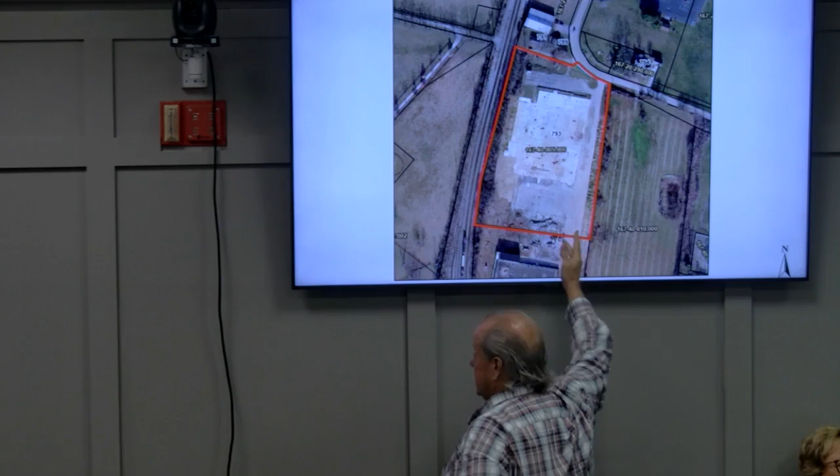Right here, yeah. And where's the gate? Right here is the roadway, existing. We're right here, they've got a turnaround area that goes all the way to the edge of grass over here and all the way out. This is their loading and turnaround area, and it's right at the entrance of the existing road. It's been there since 1988, 37 years.

And that's our only concern, we had some earlier discussions but nothing ever came of it. The other thing is, when they did this in '88, they put a 50-foot ingress and egress easement from the property line over this way in. But when you measure that out, even though the roadway - we've got a prescriptive easement since 1988 because it's been going in and out like this and everybody's been happy - we only got 11 feet in the back.

At the gate? At the gate, because of the grass area over next to where you're talking. Well, if it's not road- we, yeah, if we measure from the fence, 50 foot, we got 11 foot from the grass. And it angles this way, towards the other front.

39 feet is the grass to the side. But all we're asking is a semi-truck and loading turnaround area, if they just move it over 30 foot from the toe slope, the edge of pavement, it's always been there. Just move it over 30 foot and give us 30 foot all the way in and out. Everybody's using that right now anyway. They do have the space to be able to do that. Absolutely, yes sir.

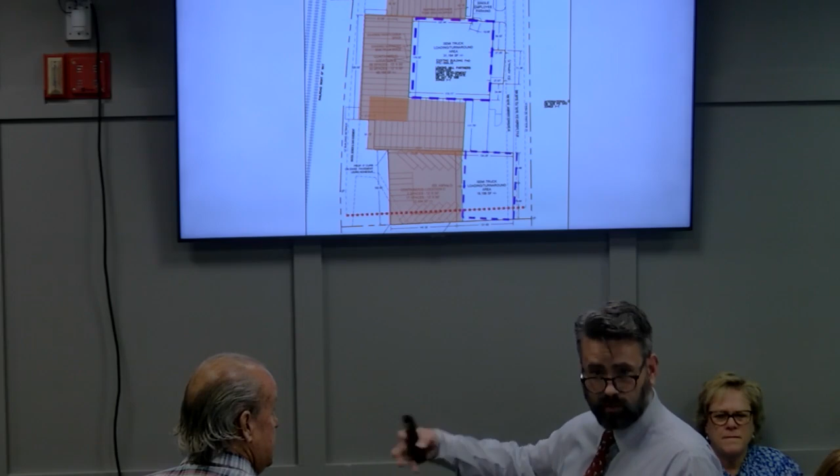May I address, please, there are some items in there that I think... Okay, if I may, Mr. Bash. Yes sir. So as part of this development plan, let me understand, are you speaking of this area down here? Yes. Okay, so I will say that the layout as proposed, while in general the development plan meets all of our standards and whatnot, there is a condition in place that all of these containers must be set back as such a building would be.

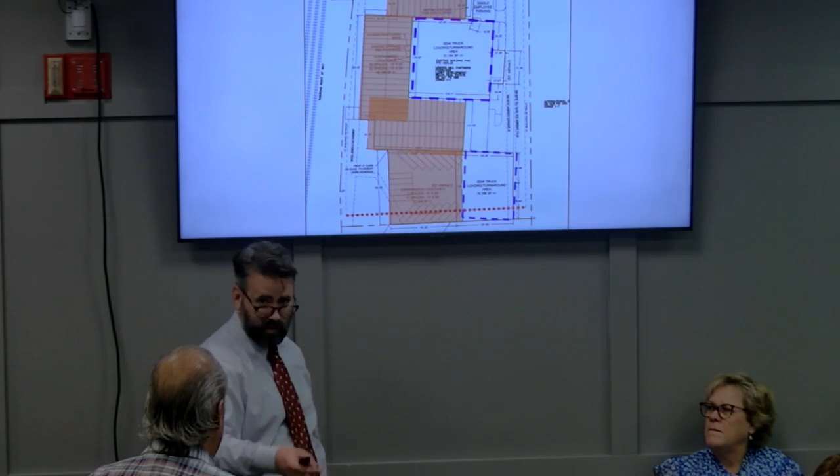That's a condition of outdoor storage. Mr. Bastion, to your point, they are currently showing the containers all the way to the property line. By the ordinance and the requirements, that's inappropriate. There is a condition of approval in there, and it is based on the standards of outdoor storage and the placement thereof, that they will have to pull these containers back beyond the setback line of the property's edge. Now, impervious surface, vehicle use area is not beholden. It would just be the containers. They're treated as if they were a structure.

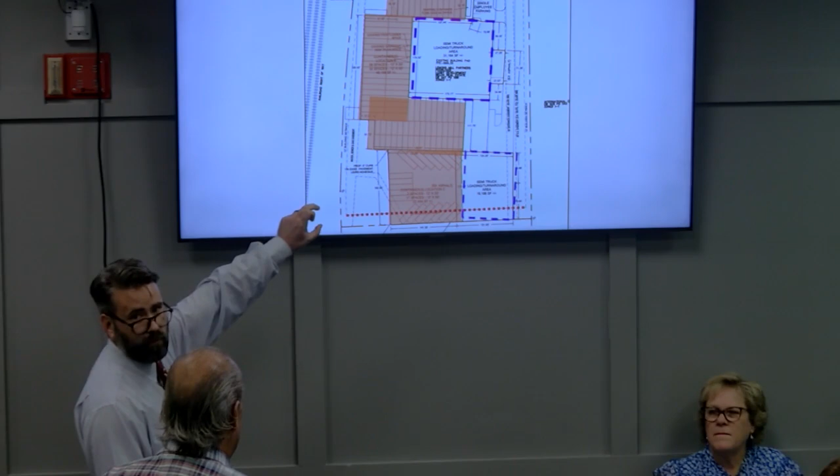I don't know if that helps your concerns, but this section here, all of the orange shaded section, is proposed storage area. So all of that would have to be brought within the setback lines before their final approval for the development.

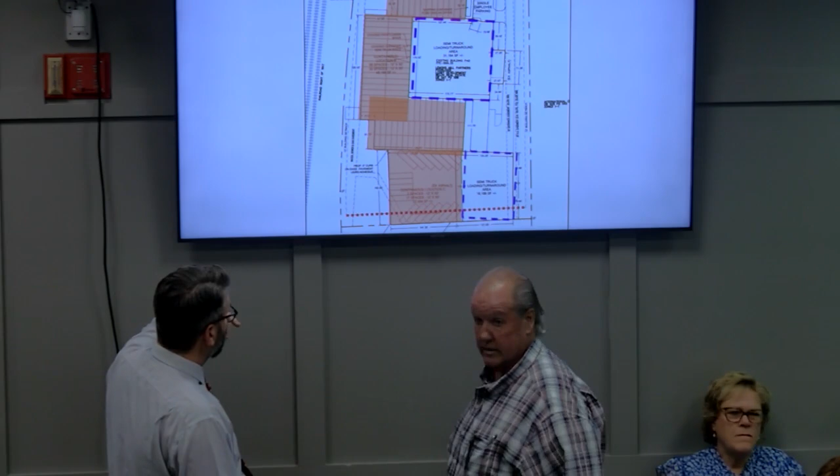I don't know what the rule is here, but I don't have a problem up to the property line. I mean, it's their property. But over here, we do have a problem because nobody can define loading and turnaround. How long? What if they get up there, I'm gonna exaggerate, a couple hours? Are we not supposed to be able to get in the property if we put a gate there? We can't put a gate over here, it doesn't match the road.

Does that make sense? I mean, yes sir. So your concern is getting into your property. That's it. That's all. I want to be a good neighbor. We just want to get to the building in the back.

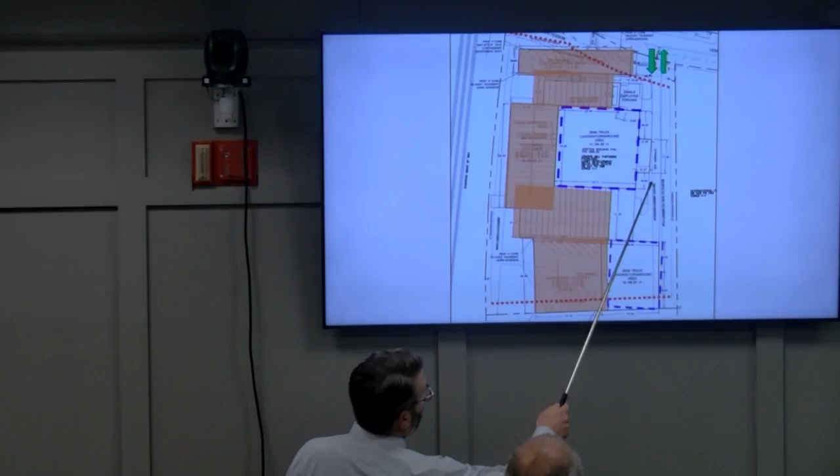Right, that's it. The access easement he is referencing is not only recorded on pre-existing plats, but also noted on the development plan with a plat reference. It does exist on his development plan. He's saying, goes from the property line to right here, we have 11 feet. What I can do then is I can come up through here and I'll plow up this all the way through there and I'll make it through the utilities and all.

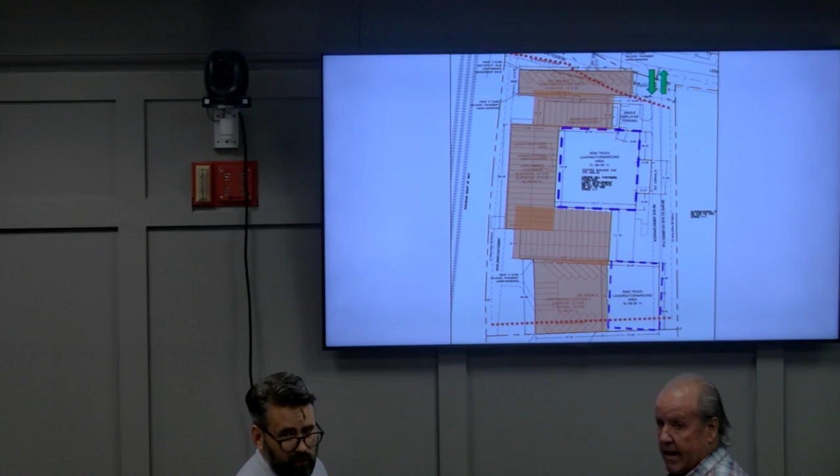Easements are a civil citizen-to-citizen thing, but we do note them on recorded documents. Mr. Perkins and Holden, if you have anything else to add in that regard. If that's the recorded easement, if a plan doesn't work, we can still make adjustments to it. But we do in fact generally recognize the easement that exists. But if that doesn't work with the plan, and this doesn't sound like it's working, then we can make adjustments to that. In effect, we can require more than what they actually got for an easement.

It's designated on the development plan as 50. On this drawing right here, it actually has the turnaround area over in the entrance. Is that right? Does that make sense? You see that over there?

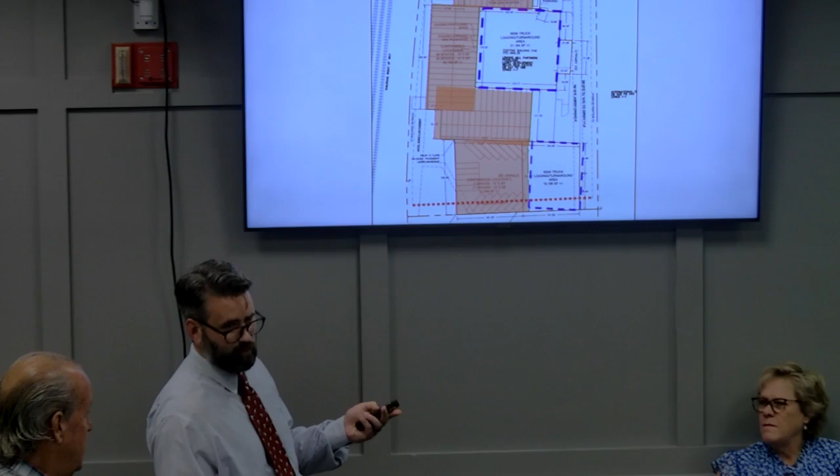It does, but again, this is just a repurposing of what exists. It's not any addition, maybe improving the impervious area. The applicant and the representation, I believe, are here as well, and may speak to more than that. The way staff understands it, and it's been presented in this case as well as part of adjustment, is that nothing necessarily will change here. It's just reuse of the existing impervious surface. There's no structures being put up.

If it would help the commission, I'd be glad to give the full presentation. Well, I think if we could, the developer, the owner's here?

I think we just got the one issue. If we could get their interpretation of the easement, because I know they're not gonna park anything there, but I understand what he's saying. You got to be able to get into the property. Define how long is unloaded. Nobody wants anything unloaded in front of their driveway going to their house. Unload it over to the side, that's all I'm asking, move it back this way. And we had spoken about that.

I'm Brian Ward, Palmer Engineering, representing the applicant and the landowner. There's two things being discussed here. Number one is this 5-foot encroachment of the turnaround and loading area into the existing 50-foot easement. The owner's perfectly fine with pulling that back to coincide with the 50-foot access easement that's in place. That's no problem whatsoever.

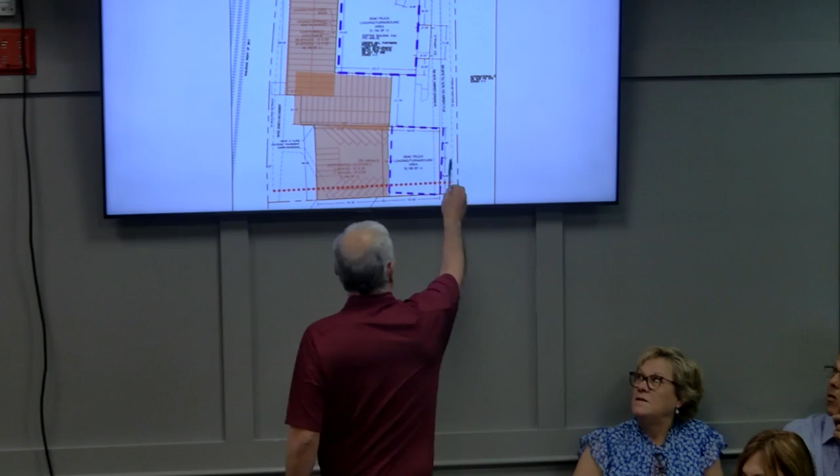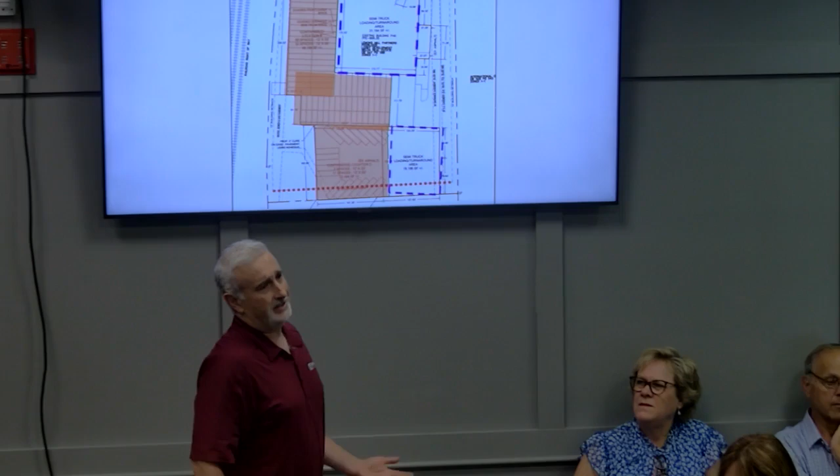However, I think what Mr. Campbell's trying to say, just to clarify, is if you look at his property line, that 50-foot access easement only allows him 11 to 15 foot of paved area. If you go back to the aerial, the majority of that access easement is in grass. That's what he's trying to say. Yes, but the applicant is perfectly willing to pull back to the 50-foot access easement and honor any easements and things on the plat and whatever needs to happen there.

Is that all you were looking for? No, that doesn't give us anything, it gives us 11 feet. We don't, what we're saying is the ingress and egress—I understand the judge may have to decide if it's a prescriptive easement, he'll have to say yes, put it on there. I don't wanna do that, but we're only getting 11 feet, we're getting nothing. You can't even drive a truck through there.

Mr. Campbell's asking for an additional 19 to 20 feet of additional easement to the 50 feet, making a 70-foot wide easement to his property on the applicant and owner's property. What we're doing is we're asking for what has always been there, the existing roadway. Everybody uses it now. No more, no less.

Is the existing roadway in that 50 foot? A portion of it. So when they built it in '88 and they put that on the plat when they split the properties up, it doesn't match what was there. It's partly in the grass.

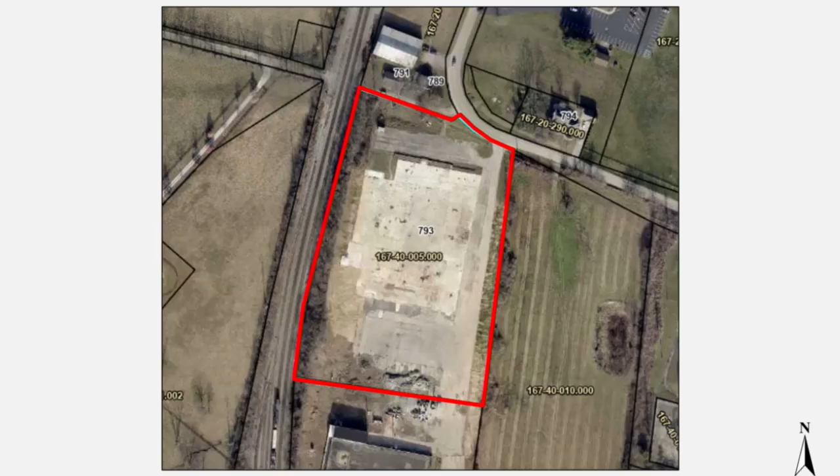Again, this is the subject property in question, just confirming that it is industrially zoned. As you'll see there to the west, it does adjoin a railroad bed, other industrially zoned properties to the south and east. An item of question is that it does adjoin residential property to the north, and there are requirements for when industrially developed properties adjoin residential. I'll get into that in just a moment.

As we've seen before, this is the proposed site plan. The shaded areas in the light orange color are where the applicant proposes to store said containers. Denoted there by the red dashed lines are the building setbacks at which the proposed storage areas currently encroach. The applicant did not propose or request a variance or waiver from the requirements set forth by the conditional use permit for outdoor storage.

As such, staff has included, I believe it's condition 13, that reiterates the fact that the storage areas must be withdrawn within the building setback lines.

As this is not a requested variance, staff felt it appropriate to just add that as an item of condition of approval. To Mr. Mifflin's point and others earlier, this will have to undergo a final development plan process, so by the next iteration of the plan, if this one is approved, we will require those changes.

The purple dashed lines there are the proposed turnaround, loading, and offloading areas for the trucks and associated machinery, forklifts, and so on, to operate within. Again, just to reiterate, there will be no permanent structures erected on this site. It is essentially a repurposing and reuse of what exists.

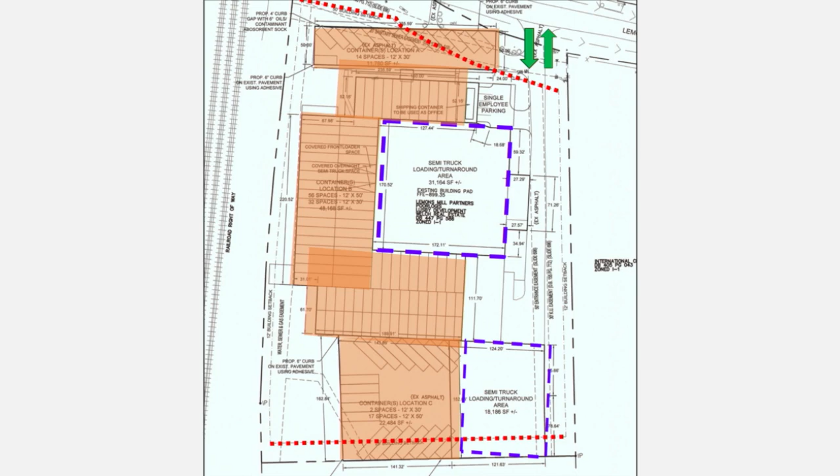There will be a temporary construction style office. I'm sure it's going to be shipping container style as well, placed on site, again, temporary. The applicant has stated that there'll be just one person on shift at any given time. Business hours are detailed here in just a moment.

6 a.m. to 4 p.m. on weekdays only. These containers are essentially utilized by large-scale retailers as inventory changes over, things of that nature, so they'll ship in, ship out, so to speak, as requested. The applicant has also indicated that private individuals may request to rent them for storage for their own personal purposes.

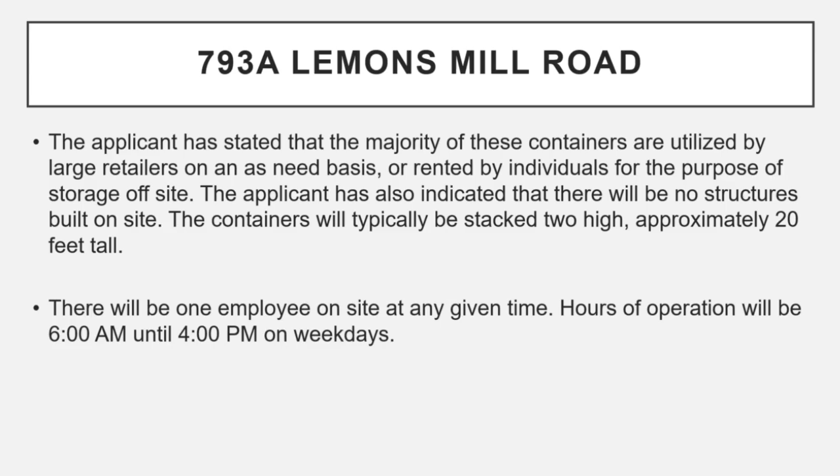Section 4.53 of our ordinance does list outdoor storage as a conditional use, which has been previously approved. With that comes standards that must be met, that the storage is incidental to the principal use of the property—again, repurposing of the site for that.

Storage shall not be visible from any right-of-way or adjacent area of a different zone. I'll detail the landscaping and screening requirements for that in just a moment. The screening utilized must be of a certain type, consisting of an earthen mound, planting, fence, or walls. Also, as I've spoken to before, the storage areas must satisfy minimum setback requirements of the zone as if they were a structure. That ensures proper screening, so adjacency to other properties is not an encroachment, a hindrance, or an eyesore to others.

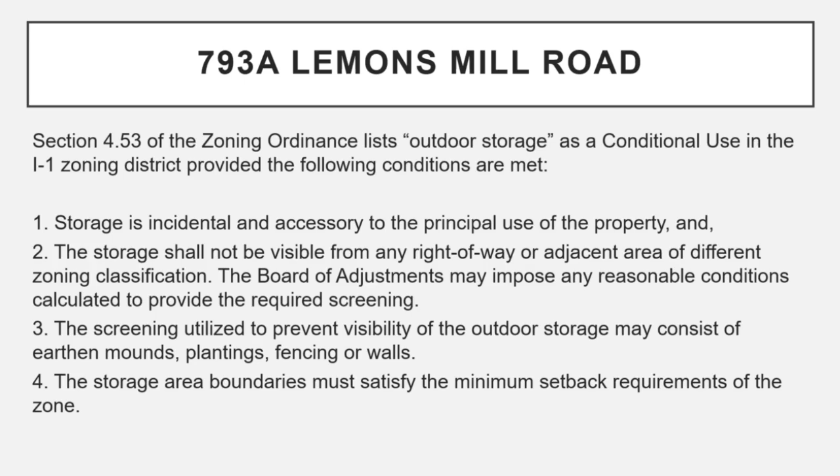Also, the land use buffer ordinance does speak to the screening of outdoor storage. It must be screened by a solid wall or fence not less than 6 feet in height. So in addition to our other requirements, there will also have to be fenced-in areas of the impact.

As stated before, the property does adjoin other industrial properties; however, there are no screening requirements for the property itself. The use described does have requirements, but just for the development itself. However, as it does adjoin residential property to the north, it will have some minimum requirements of a 10-foot wide landscape buffer, consisting of trees and hedges and so on, to achieve the opacity required by the ordinance, protecting lines of sight from residentially zoned properties, adjoining roadways, etc.

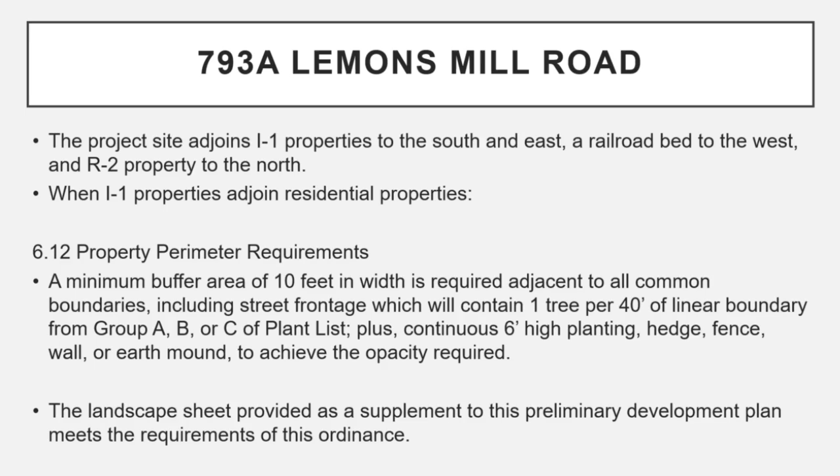There is also some screening along the vehicle use areas as they adjoin the right-of-way at Lemons Mill. The residential property to the north will be beyond the screening detailed here with the hedges and trees. All of the landscaping shown on the landscape sheet with this submittal does meet the intent and requirements of the ordinance; however, this sheet is not typically required until the final development plan.

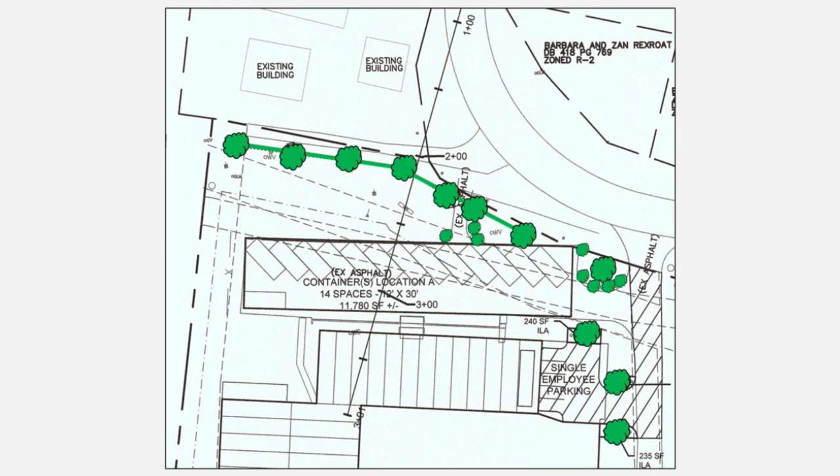They have supplied it here just so that we're ahead of the game, and again, it does meet all the requirements set forth by the ordinances. The applicant has also provided a line of sight diagram that details how the site would appear, with the established screening, if you were on the roadway in a car on Lemons Mill looking towards the site, which is at a slightly different elevation from the roadway itself.

Again, staff and the ordinance do not intend for 10-foot tall trees to be placed in at time of development. However, as the screening and the trees mature, this is kind of a typical line of sight diagram you would expect to see as you came and went from the area. If you have any questions about that, I'm sure the engineers could explain it much better than myself.

Brett, would you clarify whether that is illustrating a single stack or a double stack that the applicant is requesting? This delineates the total height as proposed. If it differs, yes, this is the total height as proposed from the roadway with the associated screening as required by the ordinance. It's going on the far right.

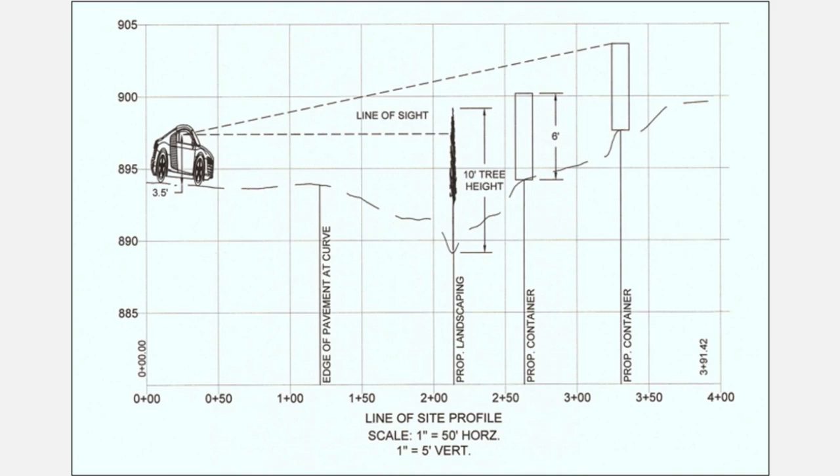Yes. So that's equivalent to two high—am I understanding that correctly? It looks to me about... sure, that's 10 foot high. That appears to me to be a single stack.

Staff did not put the diagram together. It was included on the development plan, so I clipped it and placed it. If you have any further questions about that, the applicant or their counsel could detail more.

This site is within the Royal Spring Aquifer Recharge Area, and as such, subject to the jurisdiction and requirements of the Wellhead Protection Committee. Remediation items have been put in place, and the final development plan will also require a full stormwater remediation report. The Wellhead Committee has met and given their blessing of sorts to this development, and issued certain requirements the applicant will be beholden to. Those are detailed in the development plan and will be carried over to the final development plan, and they will have to comply with those.

Mr. Krebs, I hate to volunteer you, but if there's any questions regarding that, I'm sure he'd be glad to answer. To further those issues, all equipment on site, if overnight and not in use, will be put under canopies as installed by the applicant so as to prevent any runoff during a rain event.

I believe there are other containment issues to be placed along the perimeter. There will be gutters of sorts which also have oil water separator mechanisms in them, again to eliminate or mitigate any runoff issues or pollutants. The final stormwater plan will detail all this through the final process.

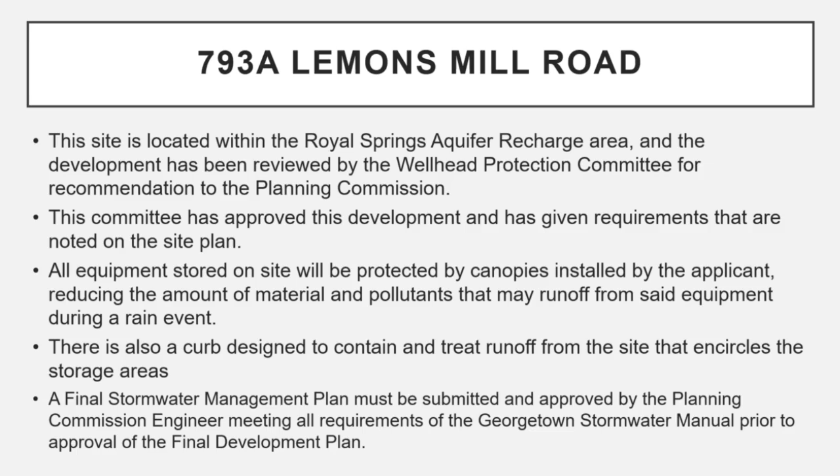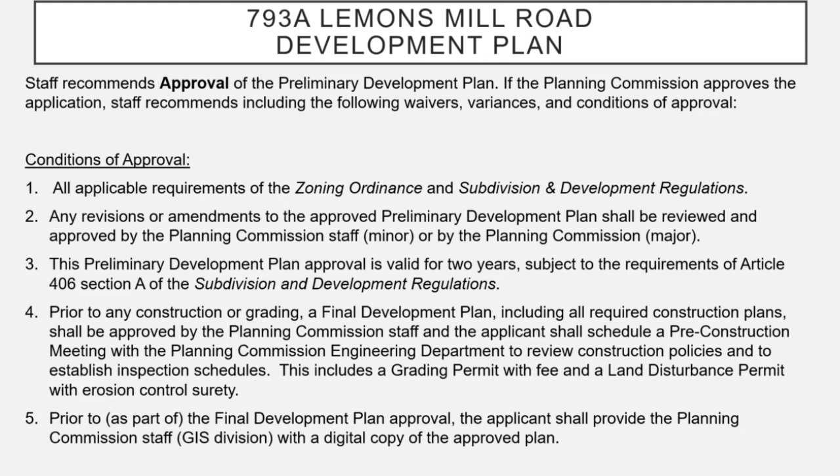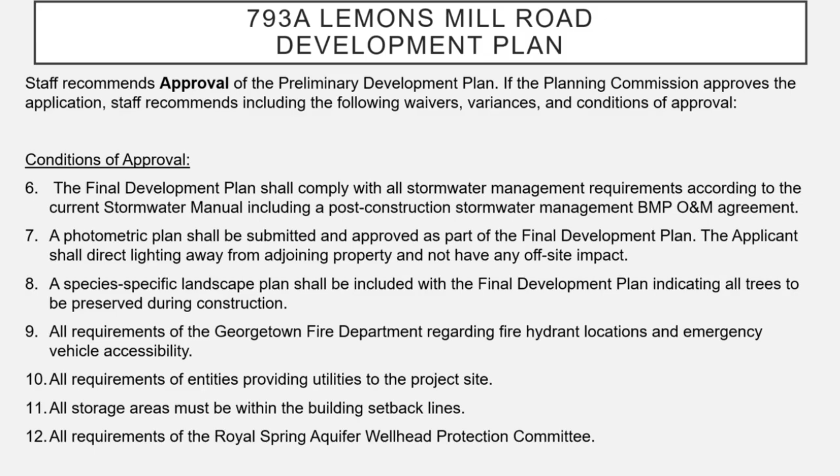All storage areas must be within the building setback lines, that's number 11. And number 12, all requirements of the Royal Spring Aquifer Wellhead Protection Committee must be met and upheld.

Can we ask the gentleman a question too? Absolutely. Sir, can you tell me how many years you've had that property you said you were using? December. December of this year? Yes, sir, we just. Thank you. December.

Excuse me, Mr. Chair, we haven't sworn in witnesses yet. If there's anyone that planned on speaking or has spoken, could you stand and Mr. Perkins will swear you in. Do you swear or affirm the statement you make tonight to be the truth, to the best of your information and belief? Yes, sir. Thank you all.

I'll say one thing, I didn't want to bring this up tonight, but I'm going to anyway. We came to an agreement. There's a water line that has to be put on this per the fire marshal, from the main road 300 foot back, to put a fire hydrant in. Partners came to me and said that fire hydrant's because of your building in the back, not because of ours. We'll buy all the materials for the water line. If you'll pay to put the water line in for us, we'll give you the 30 foot that you deserve.

I called Miss Willett, since I've got burn permits from her and stuff, and I said, can I ask you a question? Is that fire requirement because of me? She said, you're not on the development plan, Willis. I said, I know, but I'm hearing things, I just was trying to verify. She said, no, it's nothing to do with you.

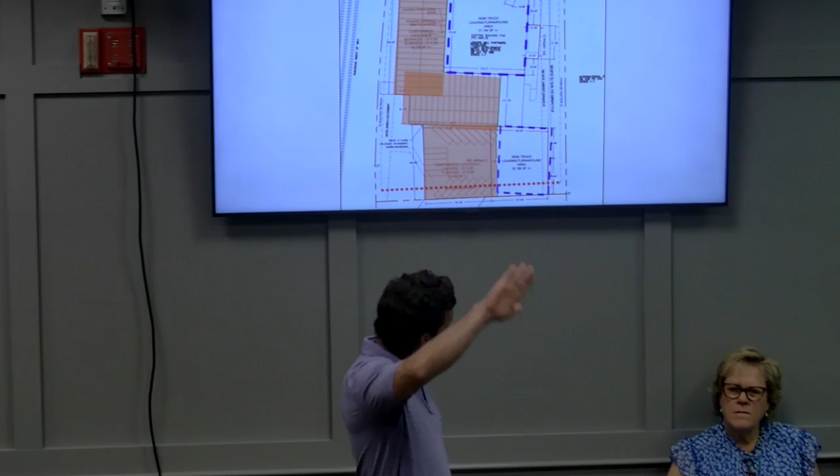There is, like you mentioned a few times, a 50-foot existing easement. Most of the easement, as Mr. Baston has pointed out, is up in the grass on the slope. There may be other options rather than just us giving an additional 30 feet, and that's just something we're going to have to work through.

So it sounds like to me that both parties need to sit down and do some discussion, you with the rest of your partners, Matt. Yeah, so partners are usually a good thing, and they are a good thing. But with partners you have different opinions, and we have to all come together and figure it out. Lucky I only have to talk to my wife. And that's just where we are.

We're not trying to be a bad neighbor, and I'm not either. We're not trying to out-leverage Mr. Baston, it's just not as easy as saying, here it is. We just need to do some more talking, that's all it is. All I wanted was some time to do that before it got... I don't think they're gonna be there forever, and I didn't want to reinvent the problem for me later on, because we plan on owning this for a long time.

But up to now, that's not been able to take place, is that correct? Yes, sir. You have to correct me if I'm wrong, but Matt's tried, Matt's reached out to me, when he's got a whole tribe. We have time between the preliminary and the final, is that right? That's what Mr. Perkins was saying. We can approve this as it is tonight with that additional condition.

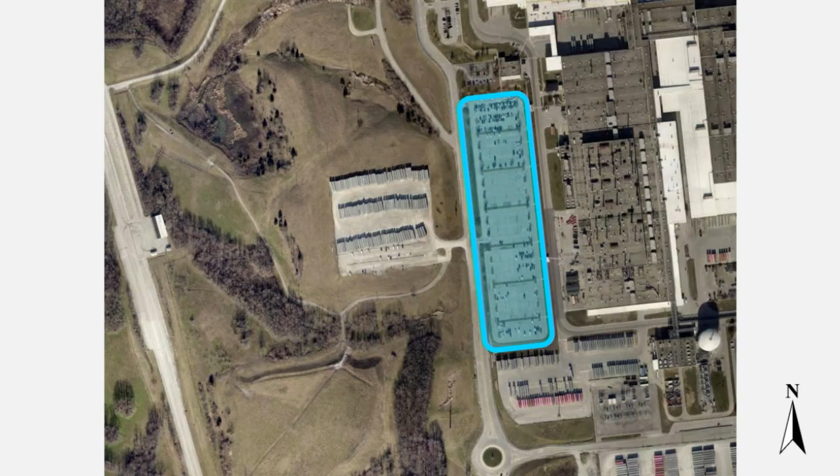I've zoomed in here. At the time of this aerial imagery taken in February of 2025, it is a vehicle parking lot. Toyota recently had announced a new investment in their facility that would necessitate a new building, and it was identified that this location would be their choice location, which would result in the relocation of their parking lot for the paint shop building.

This is kind of their project here, and I've broken it into the three parts that we're looking at. Site work 1, which is the realignment of Outer Ring Road, was a minor development plan that staff reviewed internally. It saw the relocation of that parking lot, as well as bumping out Outer Ring Road to ring around this new building now. So Outer Ring Road, and then also that parking relocation.

Site work 2 is the project that we're looking at right now, the specific building that they're interested in building. And then site work 3 is just with the moving out of the parking lot to make room for the building. But the parking lot, we had to relocate some trailer storage, so it's all kind of maneuvering places to other places to allow for expansion of the facility.

The building itself is rather large, and it does adhere to our building setback requirements. There's no violation of any lot coverage requirements, given the high volume of land in the area and the kind of, at times, compact, depending upon your perspective, development of the property. They are going to impose on the height requirement for the zone, so they have requested a variance for that.

State statute lists specific findings that are required when we're reviewing variances, which I've included on the board. Before any variance is granted, the board must find that the granting of the variance will not adversely affect public health, safety, welfare, and would not alter the essential character of the general vicinity, will not cause hazard or nuisance to the public, and will not allow an unreasonable circumvention of the requirements of zoning regulations.

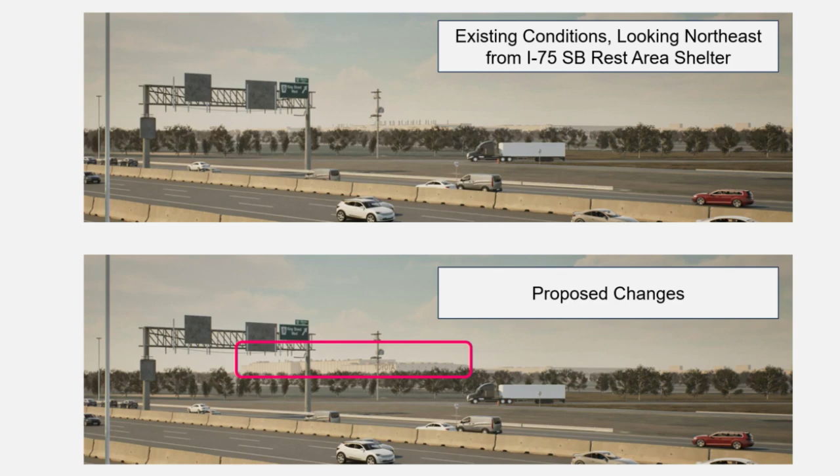This is some aerial imagery showing various views they submitted as part of their project. Looking northeast at this I-75 southbound rest shelter, I've circled the location of the building. The top of each reference picture shows existing conditions and the bottom shows the proposed changes. In that area, you can see a slight peek of the new building.

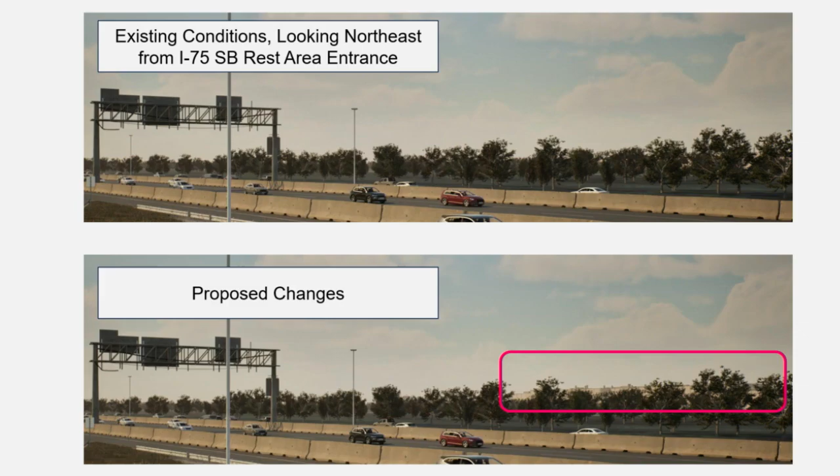I will allow SSOE, who is the design firm, to speak more to it. I just wanted to include it because unfortunately the pictures didn't make it.

In their supplemental letter, they stated that the additional height is required to facilitate advancements in automotive manufacturing and to leave sufficient space for those processes. The additional vertical space would allow for modernization of a lot of those technologies, increased efficiency, and ultimately we do like to see modernization. We like to use the least amount of space possible, really try to condense things down, and this additional height can facilitate that condensation of activities to a smaller area of impact.

Staff does, after considering the request and the existing campus layout and unique needs of the uses, find that the requested variance satisfies the state statute requirement, and staff recommends in favor of granting the variance for that additional height as part of this request.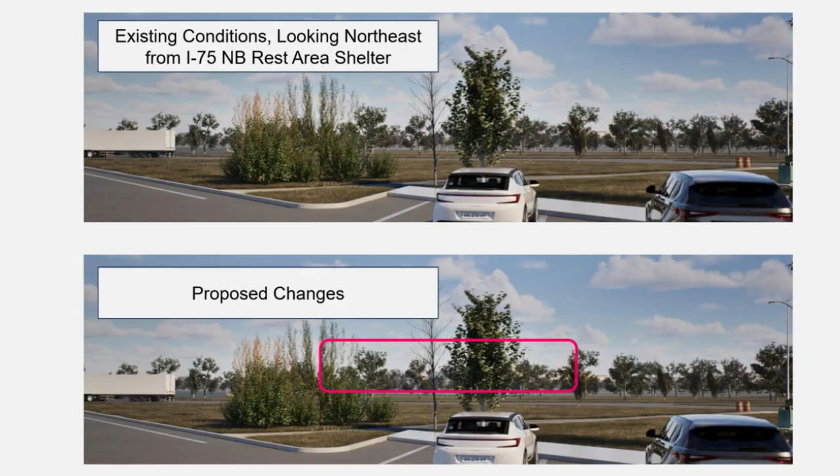Again, I've already referenced the road realignment project. They're just using existing road systems and existing parking areas that are being relocated. There was no loss in the number of parking spaces, and per correspondence with the applicant's engineer, there would be no reduction in the parking areas, and there was sufficient parking on the campus to satisfy the needs of all staff.

On landscape and land use buffers, staff, after review of the location of the property, concluded that the proposed building would not impact existing perimeter landscaping. Again, with the relocation, they're just using existing spaces. Furthermore, because there are no VUA perimeter changes as part of this specific site work package, no vehicle use area perimeter landscaping nor interior landscaping would be required.

We did thoroughly work with them to make sure that when they were doing the road realignment, all of the requirements of the landscape ordinance were met, and staff is satisfied that they have met the extent of that ordinance without requiring a variance for it, which is why I was able to go internal review for realignment. Furthermore, the location would not result in any changes in the tree canopy. Again, there were no trees in the area, and they're going to have no more trees in the area with the building there, so no tree canopy was changed.

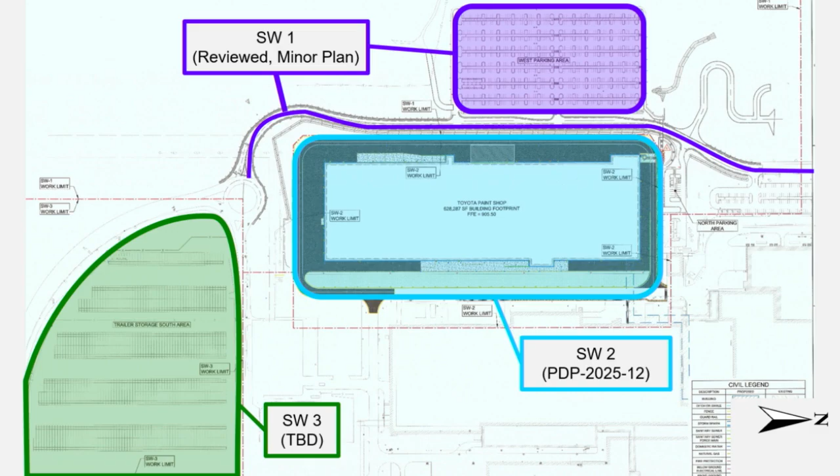Staff did put a final note to require a photometric plan as part of this, just to ensure that no additional lighting from this specific building would be noticed off-site. It is important to understand that the photometric plan is for this specific building, so if there are existing lighting issues, that may not address it, but if there are complaints, we can certainly work with the applicant to go forward as needed. Ultimately, staff recommends in favor of the preliminary development plan with the building height variance as requested and 8 conditions of approval.

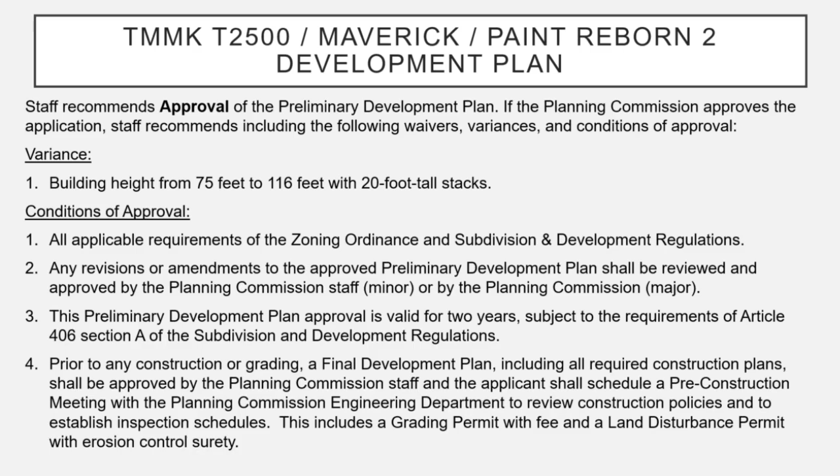The first 4 conditions are typical, the ones we usually see. The next 4 are here: the photometric plan is condition 6, condition 7 is fire department requirements, and condition 8 is working with their respective utility providers to make sure the site is serviced appropriately. If there are any questions for me, I can answer them now. Otherwise, I will hand it over to the applicant.

Just one question for the general public—we talked about this, I want to make sure I'm aware that Toyota did satisfy the safety requirements, that there won't be a problem with the height of the building if an emergency did result in needing to address this building being that tall. To my recollection, at technical review and in conversation with the fire department, they saw no issue, as they had ladder trucks that could address issues on it.

What if all the ladder trucks are busy? There's a bigger issue to deal with in that situation, but as long as we have equipment to handle that tall building. From my conversations with the fire department, and the applicant or their engineer may be able to speak more to it, there were no issues identified when we did technical review.

Any other questions for Elise? All right, do the owners have any comments?

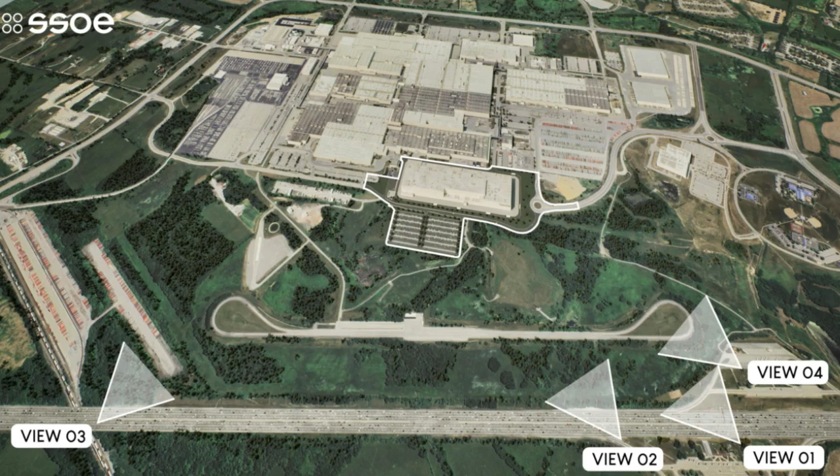Elise had some comment about the views. Would you mind going back to the overall one with the different viewpoints there? So we picked worst case scenarios. Mostly you can't see the building from the freeway, which is the closest view from the public. View 3 is from the overpass, and views 1 and 4 are from the rest areas along the freeway. If you go back to the profile or section view, that one.

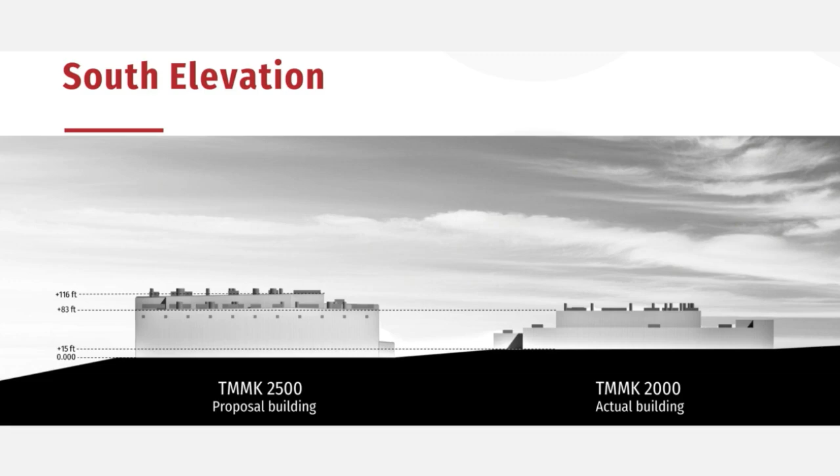So the existing TMMK 2000 building, if you're at the rest area and you look across, I did this myself, walking around out there, you can see the stacks of the existing paint shop and just the existing roof. Probably in the fall or winter when the leaves are down, you could see a little bit more of it, but you're just seeing the top edge of the existing building. So you're going to see that extra height from that area, from that view. But it's from the freeway, so we're asking for that variance. Thank you.

Any other questions for representatives from Toyota or engineers? All right. Hi, Polly Singer-Erdley.

I'm a co-owner of 1929 Cincinnati Pike. It's been a farm in the family for quite a long time. My dad had it and farmed cattle, and we have it for cattle as well now. Back in March, I received a notice from the U.S. Army Corps of Engineers from the Louisville office, saying that the project will affect the waters of Dry Run, which has been mentioned in this. It says the applicant requests authorization to fill jurisdictional streams and adjacent wetlands associated with the expansion of the TMMK facility and construction of associated infrastructure. The proposal would result in the discharge of fill material, resulting in the permanent loss of 687 linear feet of the intermittent stream, 118 linear feet of the perennial stream, and a 1.43 acre emergent wetland. Then it says compensatory mitigation to offset the unavoidable functional loss to the aquatic environment. My concern, as well as a lot of other landowners around me, is that if they're going to fill that in, will that affect our streams? Because being a cattle operation and farm, we need water. So that is a big concern of ours. Do you all know what is going to happen with that? Is it going to be filled in?